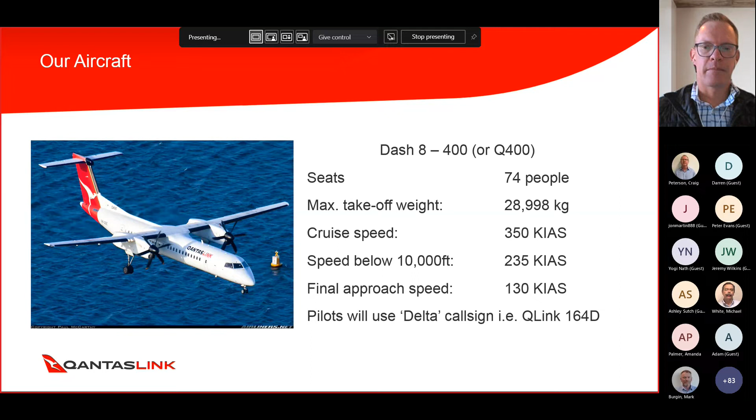The other common Dash 8 we fly - just to go back a step, the Q400s we typically fly in Queensland and New South Wales, whereas the Dash 8 300s you'll see in South Australia, Victoria, Tasmania, and bits of New South Wales as well. It's slightly smaller, only 50 people, and weighs just under 20 tonnes.

But under 10,000 feet, very similar speeds to the Q400. It'll still do about 4 miles per minute in the descent and have a final approach speed around 115 knots. These slightly lower performing Dash 8s don't use the call sign with the Delta at the end - it'll just be something like QLink 164.

So how will our Dash 8s arrive? A common way is they'll join via a circuit. If we're joining via a visual circuit, in line with the AIPs, we will join the circuit at 1,500 feet above aerodrome level.

When we're joining downwind, typically it'll be about 160 to 190 knots, depending on the type of Dash 8. That higher speed will be on early downwind, and then as we configure on the downwind leg, we'll start to slow as we put our gear and flap out.

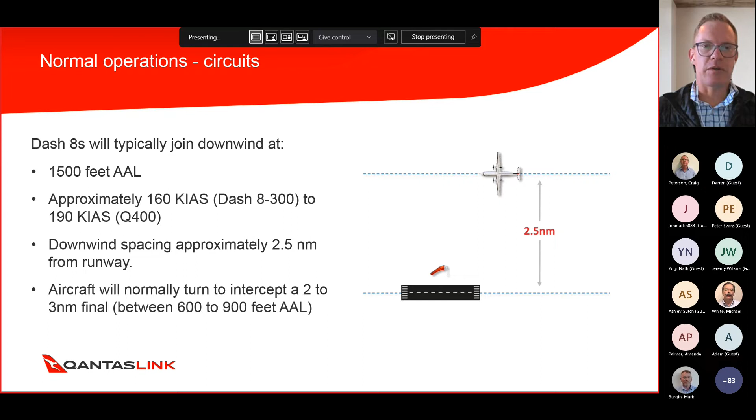Spacing from the runway to make it all work will be about 2.5 miles from the runway, and usually about 40 seconds from passing abeam the runway, we'll start that base turn. So typically, to intercept around a 2 to 3 mile final, we'll be turning final anywhere between about 600 to 900 feet. That's the visual circuit.

What's actually very common though is that we will fly an instrument approach, which puts us onto a straight-in approach for a runway. Using the Wagga example here, this is an example of an RNAV approach, or an RNP approach. I'm not going to break down the chart - it's a lot to go through and might be a little hard to see on your screen, but this is a typical RNAV approach into, in this case, Wagga runway 05.

All an RNAV approach or an RNP approach does is give us a series of GPS waypoints that we cross at a particular height, and it basically puts the aircraft on rails. It lets us fly a nice, consistent approach all the way into a straight-in approach.

Typically, we'll start one of these instrument approaches via one of these initial legs here, at about 5,000 feet above aerodrome level. We'll slow down to below 160 knots by the time we get to a 5 mile final. So altogether, it takes us about 5 to 6 minutes to do this instrument approach before we land.

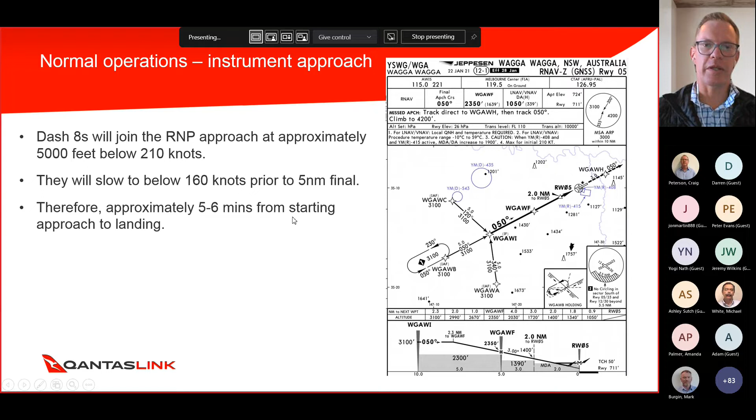So the instrument approach, like this, it's probably the most common way that we will arrive at an airport. You might be asking yourself why QantasLink, as well as other RPT operators, do these straight-in approaches, these runway-aligned straight-in approaches. When I was early on in GA, I used to think that pilots doing straight-in approaches were maybe being a little bit reckless.

Or maybe they're just trying to save time, maybe they're a cowboy. But as I've gone through the industry, I've learned that there's actually a number of benefits to flying a runway-aligned straight-in approach, particularly for your larger RPT aircraft.

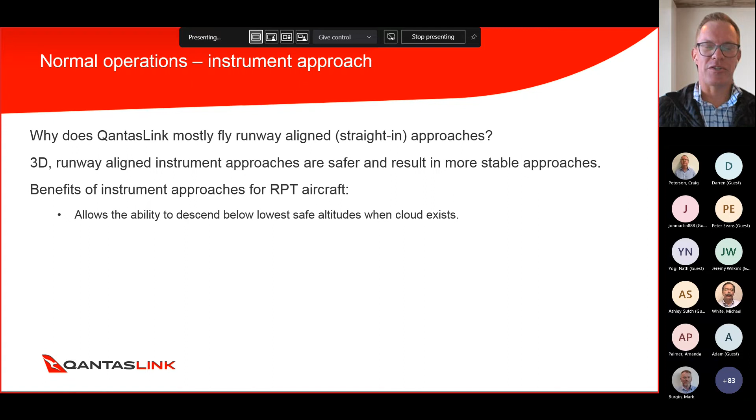The data's shown that 3D runway-aligned approaches are safer and result in more stable approaches for us. There's a number of other benefits too for RPT aircraft. The first is the ability to join an instrument approach that allows us to descend beneath the cloud and get visual with the airport. That's probably the primary reason we'll fly an instrument approach.

As I explained earlier, the approach basically keeps us on rails. It allows a consistent flight path, which allows us to manage our speed and inertia a lot better. It's also all hooked up to automation, which makes it really easy for us to fly, and that gives us time to concentrate on other things, process information better, and improve our situational awareness, particularly when looking for other traffic at non-towered aerodromes.

For us too, it's a predictable flight path, and that makes it predictable for you. Hopefully you know where we are. If we can broadcast on a 10 mile final to runway 05, that makes it a lot easier for you to understand where we are.

What we've found too is that flying these approaches actually allows safer separation from circuit traffic as well as training areas. Usually we're well above training areas, but also because we're not joining a visual circuit, we're not overtaking aircraft or anything like that. It puts us on a final leg, which makes it easier to spot and identify other aircraft in the circuit.

For us too, it's actually easier to navigate and find the aerodrome. If I'm going to an airport I haven't flown to before in the Dash 8, I'll fly via instrument approach and it lines me up really nicely with the airport and makes it easy for me to spot. And lastly, better flight deck visibility of circuit traffic.

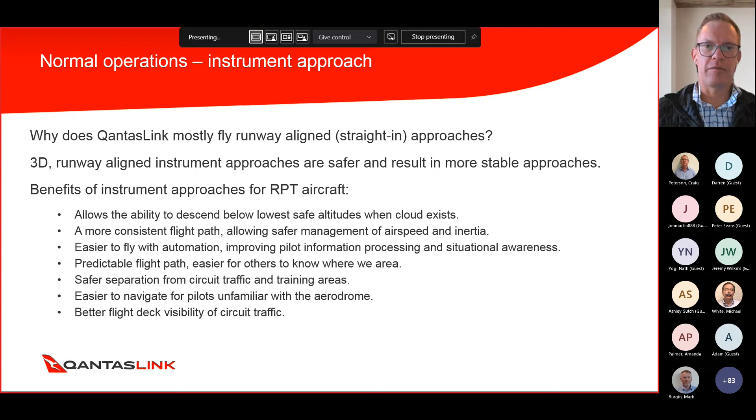So there's a number of safety advantages with these runway aligned approaches, but the only issue is there's a slight disconnect with the CASRs, and you may have come across this. I'm not going to go through it in detail, but what it basically says is for a straight in approach, you need to know what the wind direction is at the aerodrome.

And we do that - we'll listen to the AWIS or some other method to determine which way the wind is blowing. That allows us to then understand the runways in use at the aerodrome, as well as when we listen on the CTAF. We'll usually start listening well before we broadcast to get an understanding of what circuit traffic are doing.

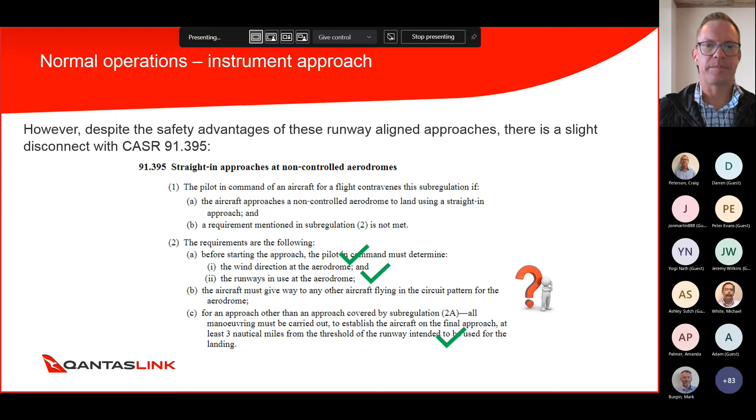What we've been seeing recently with the increase in flying, particularly at aerodromes where there's a lot of flight training going on, is increased occurrences where other pilots turn in front of the Dash 8, turning base in front of one of our Dash 8s on final. As Craig said earlier, that's one of the highest risk areas for a mid-air collision, that base and final area.

Aircraft have been turning base in front of the Dash 8s, and it could be for a few reasons. It's always hard to know, but it could be because the pilot believes they have right of way, or it could be that the pilot was unaware the Dash 8 was coming in on final near them. These occurrences have resulted in several go-arounds from our crew to get out of there, then they've had to reposition for another approach or some other way to arrive.

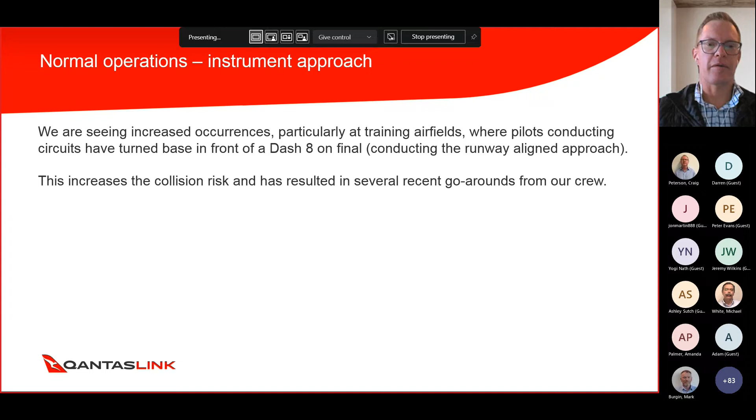Now, due to the large speed differences, it's actually almost impossible for the Dash 8 to fly a circuit if there's multiple traffic doing their circuits as well. You can imagine, as I said earlier, we're doing double the speed of many light aircraft. If you've got two, three, four aircraft also doing circuits, it's just about impossible for the Dash 8 to try and fit into that circuit as well.

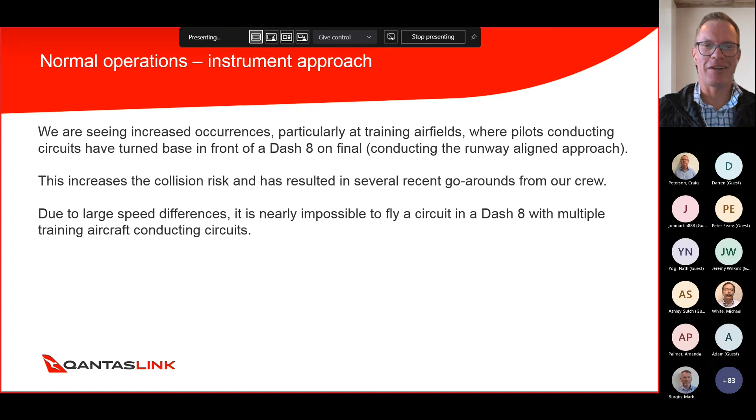Again, that's why we love the straight-in instrument approaches.

So I guess what I'd like you to take away is despite circuit traffic legally having right of way, all we're suggesting is that we work together to make the arrival sequence work for everyone. We're not saying that you have to give way to us or get out of the way. Let's just work together.

Probably the most important bit is the first point: confirm the intentions of the other aircraft and determine early on who will be number one. So if you know that you're going to be on downwind wanting to turn base, and you know the Dash 8 or an RPT aircraft is out there, just speak up, establish that communication and work out who's going to be number one for the arrival. It doesn't always have to be us, sometimes it works really well if you actually go number one, but that communication is important.

Other options could be consider adjusting your circuit profile. Now that might not always work, particularly if you're a fairly inexperienced pilot or you're doing circuits at night or something like that. But is there an opportunity for you to maybe extend your downwind, to do an orbit, something like that, to help the other aircraft out? Again, that depends on the situation.

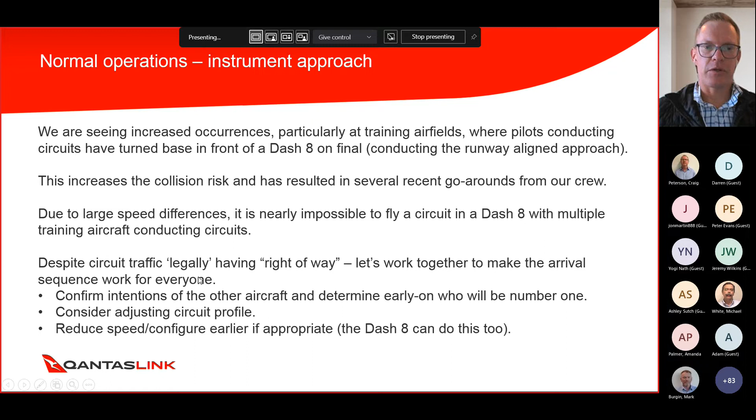Another suggestion could be to reduce your speed or configure a little bit earlier. We might do that in the Dash 8 if we know that we're going to go number two to you. We'll put out our final stage of flap earlier, slow down and allow you to go number one. But all that relies on communication and confirming the intentions of the other aircraft nice and early.

Stepping aside for a moment, we did an analysis into breakdown of separation incidents we had between 2019 to 2021 to try and understand if there was anything we could do better as a group to avoid issues. So we reviewed all of our incidents and we looked at something called the TCAS RA, which I'll explain shortly.

What we found was three main causes of a breakdown in separation between our aircraft and other aircraft on the CTAF. The most common one was a clear separation plan was not determined by the flight crew. The Dash 8 crew knew the other aircraft existed, the other aircraft knew the Dash 8 existed, but they didn't communicate. They didn't come up with a plan to say who was going to be number one, who was going to be number two, if someone was going to maintain a height, if someone was going to fly a certain way to avoid the other one. No plan was determined, they just continued on with the mindset that it'll be right. And it didn't end up being right.

The second most common cause was an initial plan was determined, which was really good, but there was no follow-up by either set of pilots to see if the plan was still appropriate. For instance, you might speak to the other aircraft and work out that they're going to be arriving three minutes after us, all good, we're going to be number one.

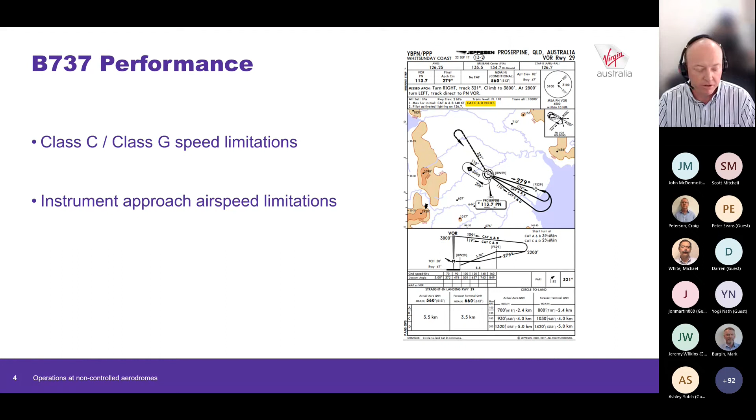Remembering that's really only running around 3.5 to 4 miles a minute to fly that whole approach. One of the other things we have, which is not just limited to non-towered aerodromes but all aerodromes we operate to, is a speed limitation in place for crew to comply with at 210 knots below 3,000 feet AFE. So irrespective of the distance out, all crew will be back at least to 210 knots once they get below 3,000 feet above field elevation as they approach the circuit.

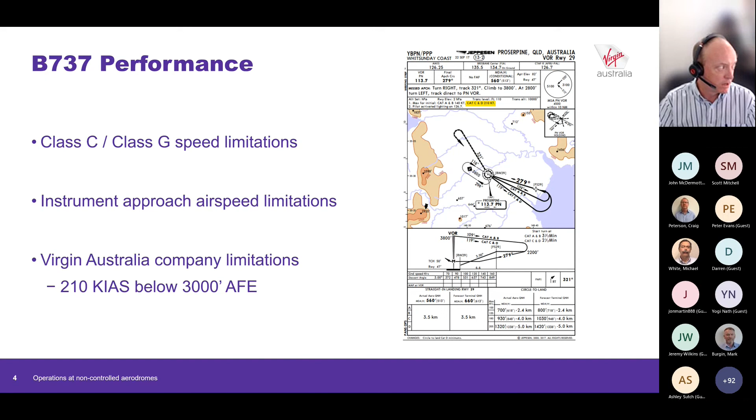When it comes to communication, we encourage our crew to make standard calls per AIP, that's a given. But we also encourage them to be proactive in communicating with everyone on the call when operating in the vicinity, making sure everyone's aware of our location and intentions. Our operations manual states they should do that with reference to quadrant and distance, which removes any ambiguity associated with instrument approach plates and waypoints. Hopefully you won't hear our crews tracking to some random waypoint on an RNP approach that isn't the simplest to work out.

Rather, we encourage them to give the quadrant and distance from the ARP. We have a couple of additional calls to ensure awareness coming into the circuit, asking crew to make a 30 and 15 mile call. Now 30 miles out seems like a long way, but at general speeds, we're only about 6 to 7 minutes away from being within the vicinity of the aerodrome.

We have a requirement that for dual frequencies, both pilots must be monitoring the common frequency at all times, listening out and looking out to pick up any traffic that might be in conflict. We also require crew to broadcast on the area frequency. So if you haven't quite reached the non-towered aerodrome area and you're still maybe 20 or 30 miles out monitoring the center frequency, you'll often hear us making a broadcast a couple of minutes before we enter Class G airspace on the way down. It's regular, because we understand not everyone understands instrument approach plates, and it's far simpler if we give a bearing and distance so everyone knows where to look.

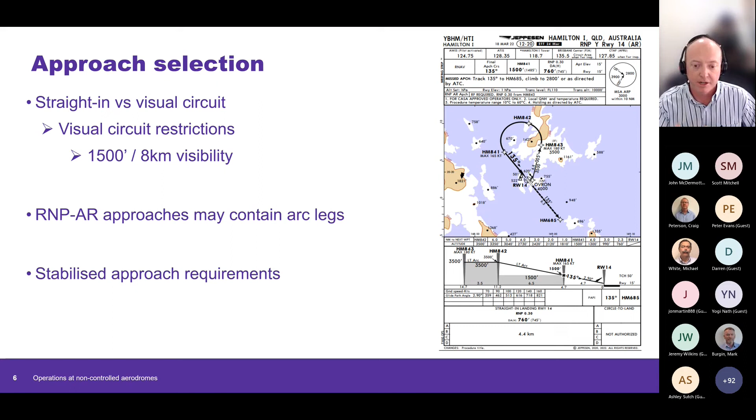As I said, this drives us into a safer position a lot of the time with instrument approaches because we are able to stabilise the flight path and meet our stabilised approach criteria. We actually improve our visibility once we get around the corner, because it allows the crew to have a lot more situational awareness to look outside the window. They're comfortable with where the aircraft is and the flight path, since it's all being managed by the automation on these approaches, which opens up their SA and their ability to look out and listen out for other traffic.

So, see and avoid - when we look at some of the limitations, I'm sure everyone here has had experience with the limitations of see and avoid. Even I remember learning to fly at Toowoomba, I had a couple of fairly close calls with that, with a couple of CTAF frequency changes.

We mandate that the pilot flying, whoever is flying the leg of the aircraft, must spend a minimum of 50% of their time looking outside. So we don't want the crew heads down in the cockpit. The pilot monitoring will have to be, but we certainly want the pilot flying outside.

We also talk with the crew in our training packages about the use of exterior landing lights. The 737's got 4 landing lights on it, 2 of which are retractable, and it's actually got 6 with turn-offs. I encourage crew to use as many of them as possible to improve visibility on their way in.

And lastly, which Andrew got to before he was rudely cut off by Microsoft, was the TCAS. It's a tool, and for us it's a very handy tool because we can see the traffic, we can see where people are going if their transponders are on, but it is not the primary method of separation. It's the last line of defence in all circumstances. Primary lines of defence for us are clear and concise communication with everyone, and separating vertically or laterally as required. The TCAS is just there in case that doesn't work.

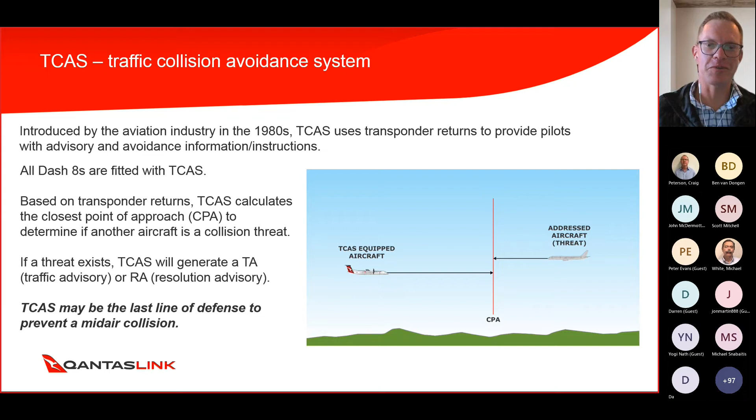We'll get a return on our displays to show where the aircraft is. The altitude readout's really accurate, but the lateral position isn't very accurate, so it can actually jump all over the place. So we can't use this for separation alone. The way the TCAS system works is it effectively calculates bubbles around the aircraft.

And if this happens in controlled airspace, out of interest, and the controller tells us to descend but the TCAS tells us to climb, the pilots have always got to follow the TCAS instructions. So TAs and RAs are a big event — it shows you're getting very close to the other aircraft's bubble of safety there.

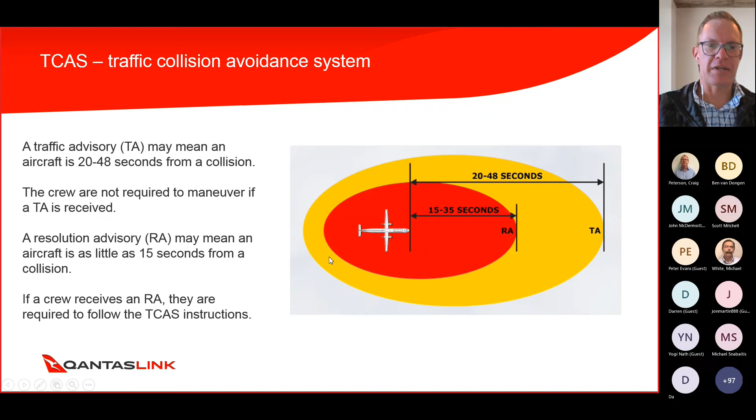So probably the most important tool to avoid getting into a separation breakdown event or possibly a TCAS situation is effective radio communication. It's vital for us and you to help manage your traffic separation at non-towered aerodromes.

Ben spoke about this, and it's something we talk to our pilots about - using plain English when broadcasting. So we encourage our pilots not to use IFR waypoints. I remember prior to my own IFR flying, I'd hear someone say they're at, say, Dubbo Sierra Echo. I don't even know if that's a waypoint, but you'd think, where the heck is that? You've got no idea at all.

So we're encouraging our pilots to use something like a compass quadrant, a bearing and a distance, to say they're 15 miles to the east. That's much easier for other pilots to understand than an IFR waypoint.

In a similar theme, we'd encourage VFR pilots not to use local landmarks or other VFR waypoints. If I fly outside of Queensland, down towards southern New South Wales or Victoria, I've got no idea where a lot of local landmarks are. So if someone says they're overhead a lake or something, I might not know where you are. That's why we're encouraging plain language and compass quadrants to explain your position.

A lot of pilots, and I was like this too when learning to fly, just think the radio's there to broadcast your position and that's it. But it's not. The radio's there as a tool for you to not only listen out for other aircraft's positions, but also to work out the other pilot's intentions and come up with a clear separation plan. So we'd encourage you to do that too - use the radio to probe the intentions of the QLink crew or the Virgin crew or whoever it is, if you're not sure what they're going to do, and come up with a separation plan.

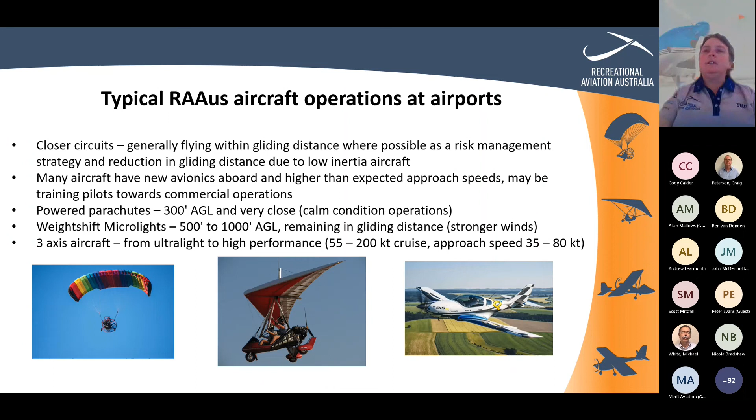From our perspective, in terms of flight planning for our pilots, our expectations in terms of our pilots and our operations are exactly what is in legislation - flight planning to ensure that you're aware of what would be happening at the airport. Part of that should include considerations of what sort of pilots and aircraft will be operating when you're flying into an airport you're not familiar with. We've talked about passenger transport, gliding operations, parachuting, circuit training, warbirds, helicopters, emergency aircraft, aerial application. The whole gamut is what you're going to find in a non-controlled aerodrome.

So some of the considerations we'd like our pilots to consider would be tracking the activity in the area. There's plenty of software and applications out there that allow you to see what's going on electronically. That does not remove the need for see and avoid with the good old Mark 1 eyeball.

And confirming that you're on the correct CTAF frequency, listening in early to what traffic is going on at that airport, use your AWIS and other traffic activity to also determine what to expect in terms of the circuit you could expect to arrive at.

And when you're arriving, take a leaf out of our bigger brothers and sisters operating in RPT, do a sterile cockpit, put away your EFBs and use your alerted see and avoid processes to focus on traffic and build the picture. One of the key things I like to talk about, particularly with our pilots and our instructors, is what are the other pilots' needs?

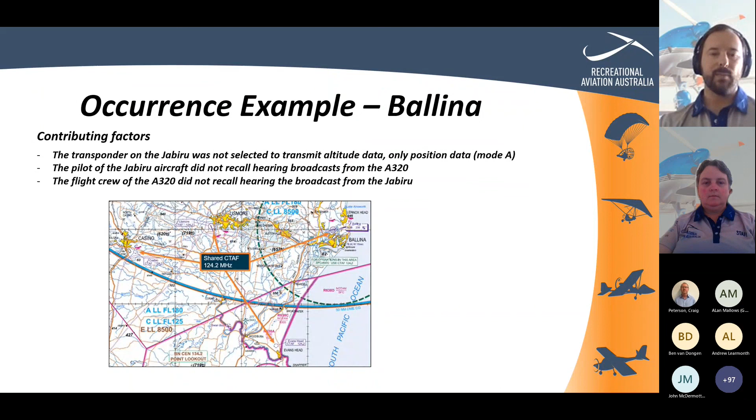What the ATSB found in relation to contributing factors was the transponder on the Jabiru was not selected to transmit altitude data, only position data - they were selected to mode A, not alt. The Jabiru pilot did not recall hearing the broadcasts of the A320, and the flight crew of the A320 did not recall hearing the broadcasts from the Jabiru. More information on this occurrence can be found on the ATSB website with their full report.

Since that occurrence, Air Services have implemented a surveillance flight information service at Ballina. Ballina now has its own specific radio frequencies, other CTAFs in the area have updated frequencies, and radio calls at Ballina are now mandatory.

But from a flight planning perspective, recently we received an additional report of another occurrence where a pilot transited through Ballina without realising those changes to the airspace had occurred, and wasn't aware of the new requirements for making radio calls in that space. So planning, communicating and listening - especially relevant here, where both pilots were communicating on the CTAF, but were going to different destinations, so weren't necessarily listening out for the other.

The second example is between two light aircraft within the circuit. On the 28th of January 2021, an aircraft was downwind for runway 12 at Caboolture Airport, following another aircraft downwind. The aircraft it was following was conducting wide circuits, so the aircraft behind communicated that they intended to pass on the inside on a close base to land number 1. That aircraft conducted a passing manoeuvre on the inside in the circuit, but failed to identify that there was in fact a third aircraft established on final for runway 12.

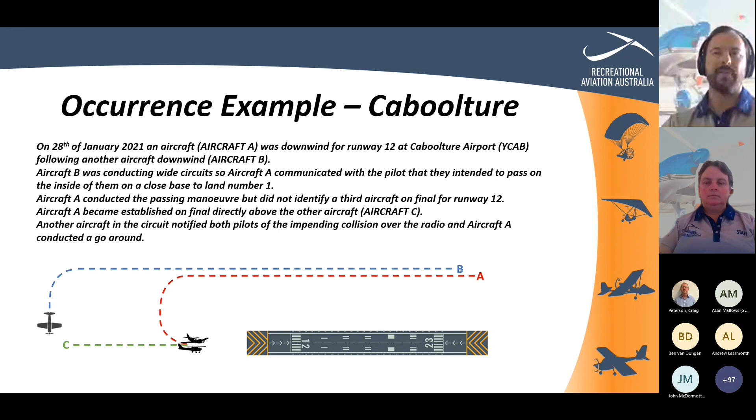That aircraft became established on final directly above the other aircraft, and neither aircraft saw each other. Thankfully, they were notified by another pilot in the circuit who noticed the two aircraft, one above the other, and was able to communicate with them over the radio. The aircraft above managed to conduct a go around.

Our review of that occurrence identified that aircraft A conducted a non-standard procedure by passing the other aircraft in the circuit. In doing so, they didn't identify that there was another aircraft established on final, and the aircraft established on final was also not identified as making regular radio calls.

Standard procedures in circuits and standard altitudes are best put in place to protect aircraft from a near miss or collision in flight. Deviation from these procedures greatly reduces the likelihood of being seen and increases the likelihood of one of these events taking place. Clear two-way communication greatly increases situational awareness, and lookout is always the last line of defence.

We should be avoiding distractions and have our eyes outside when we're in the circuit, rather than focusing too much on what's going on inside. That includes, as Jill mentioned, closing our EFBs, being planned for the circuit before we get to the circuit, so that we can be eyes outside.

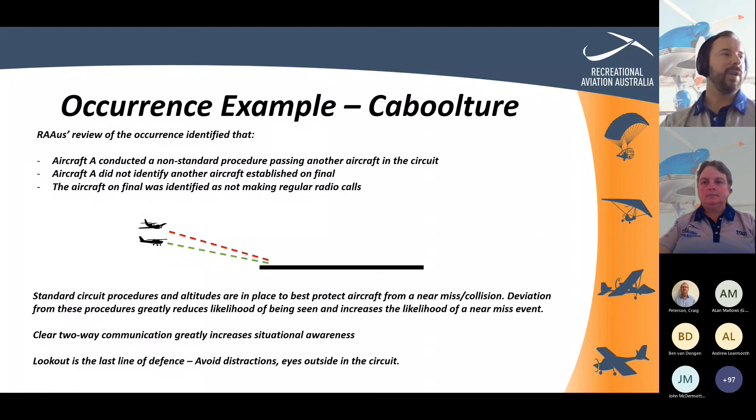There's obviously been a lot of communication about TCAS today, but also in relation to ADSB. For those who aren't aware, as of the 12th of August, the Australian government are offering an ADSB rebate program with grants available of up to $5,000. This technology may aid in alerted see and avoid and identifying the location of other aircraft. Please take advantage of that funding that's available. More information on that rebate program is available from business.gov.au for those who aren't aware of that scheme.

Passing on to Jill to wrap up.

Thanks, Cody. I think the points there are fairly self-explanatory, but I think the key is planning, as we've said - planning to know what you might expect to see at that airport. You can't always plan for everything, but at least if you have an idea of what you expect could be operating at the airport, you can plan to manage how you're going to interact with that other pilot, understanding their needs.

So understanding the lack of visibility or manoeuvrability issues they may have, and the reason why they might be flying a closer or further out circuit, communicate - particularly when you're in the CTAF - not to overwhelm the frequency, but to make sure you're communicating with any other aircraft in the circuit so everyone knows what's going on. There's no unexpected exciting moments. Don't forget to look out the window. Obviously not quite so easy for our IFR brothers and sisters, but just keep an eye out for aircraft.